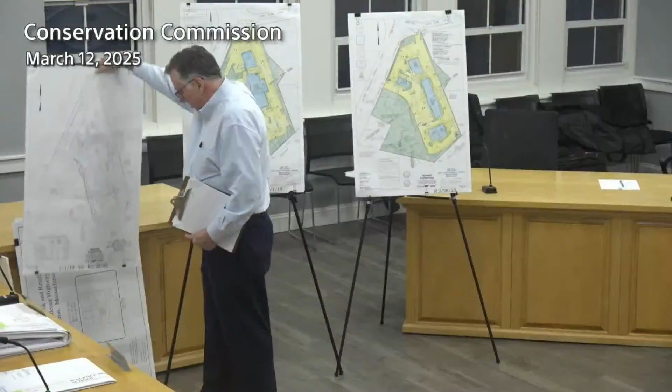Oh, I think we're on that. I'll get into that a little bit later. Okay, and that compares the two. So you should be seeing the comparison plan, which is dated... If we look at the small March set, let's look at the small set, that's the blue and red one. And then we have a set of site plans revised 2/28/25, and then we have the basic plan by Jim Stuckel's company that looks like it will be... sorry to throw a lot of.

Well, okay, listen, let me ask you something. If we eventually get to this blue and red one, that's what we really care about, right? So you're gonna do an overview on that? Yes, okay, yes, all right. I was gonna give a brief introduction. Okay, because so right now we're both on board. Thank you, on the blue and red one, but that's fine. Okay, you think this is it? Okay. So actually, if the blue and red is what we're really going for, go ahead and give us the overview.

Sure. It's got, there's bigger plans than that. Yeah, there it is. Oh, thank you. Sorry? Thank you. Oh, I'm sorry, you need to actually hold the microphone. Patrick would like you to hold the microphone, so that people on TV can hear you. Sure.

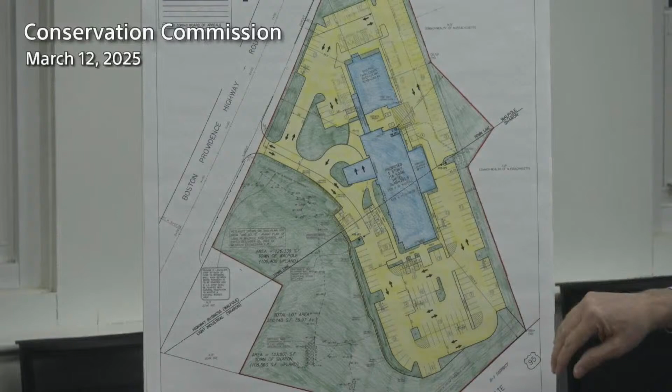Great, thank you. So the plan on the left, 7/1/19, is what you approved previously. As you can see, there's the existing Applebee's, on the intersection of Route 27 and Route 1. So there's the existing Applebee's, and you approved a proposed hotel. The wetlands and the buffer zones are in this part of the project. Today, we're here for a revised plan, revised 2/28/25. Again, we have the existing Applebee's, a hotel, where we've added a Chase Bank, a cannabis dispensary, and a retail shop. I'd like to give a brief summary of what we did with the design, and then I'll get into the comparison overlay plan.

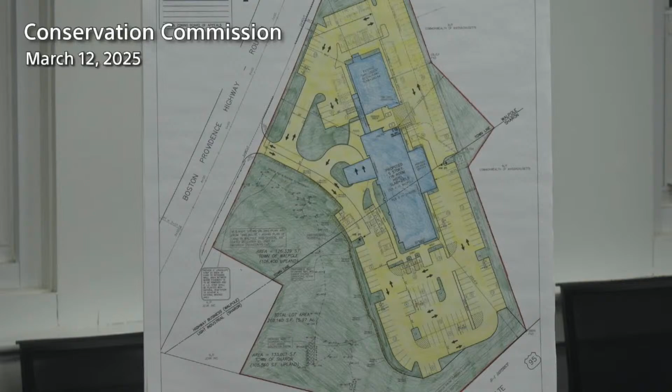We've designed the stormwater for this project with a stormwater train that has deep sump catch basins, a contact treatment unit, infiltration chambers, and then a control structure. We've infiltrated much more than the state requirement. The state requires 4,300 cubic feet. We're recharging almost 47,000 cubic feet into this system. The reason that it's so much is that we have designed this so that we are not only balancing the peak rates of flow for the drainage, but we're balancing the volumes for all of the storms. In order to balance the volumes, we had to increase the amount of our infiltration system, and that's why we have a lot more infiltration than the state requires.

So we've also, and I'll show you in the comparison plan, that we have not increased any rates going to the wetland or any volumes going to the wetland compared to what you have approved in the past. Some other things that we've accomplished: we have the 72-hour drain down, we have 44% TSS pretreatment, 90% TSS removal, where 80% is required. We've also, in our submittal, included a stormwater pollution prevention plan, long-term operation and maintenance plan, construction period pollution prevention plan, and we've done the SWPPP, the stormwater pollution prevention plan. Now I'd like to go into the comparison plan. We had a preliminary meeting with Landis, and we discussed some of the differences.

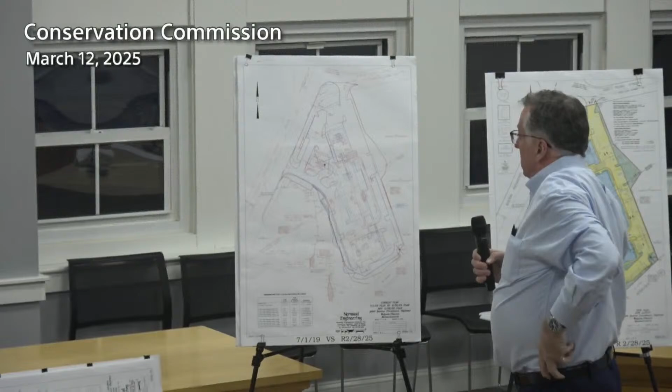The blue lines on this plan represent what was approved previously in 2019. The red lines represent what we're proposing now. I know it's kind of a lot to look at—we took out a lot of lines to make it clearer. Previously we proposed some parking shown in blue a little bit closer to the wetland than what we have now.

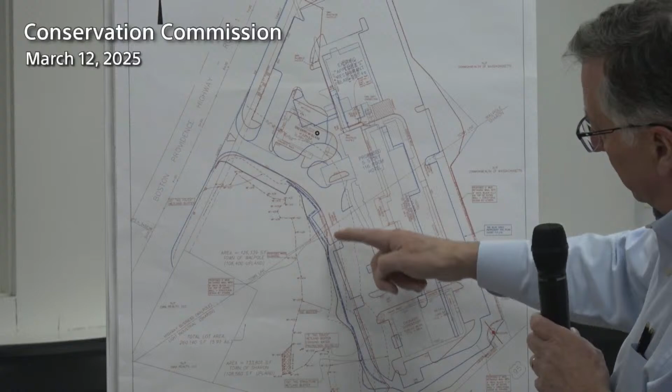The edge of the pavement in red is where we propose now, and the blue was a little bit closer to the wetlands. Let me get my notes, and I'd like to go over the summary, which is in the lower left part of the plan.

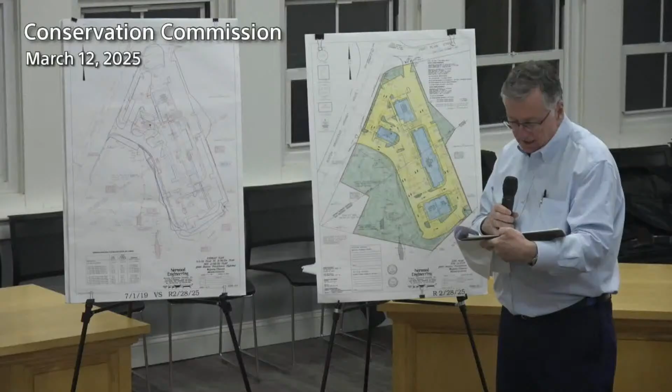For this proposal, we are increasing the impervious area by 23,000 square feet, and increasing the total area of development by 5,000 square feet. But for each storm, we list all the runoff rates and runoff volumes for the 1, 2, 10, 25, and 100-year storms.

In each case, we have either zero difference between the two plans or a reduction. For example, in the 10-year storm there's a 0.14 CFS reduction of water going towards the wetland. In the 25-year, a 0.47 CFS reduction. In the 100-year, it's 1.23 CFS reduction. So we have more impervious area, a bigger development area, but we're reducing the amount of water going to the wetland.

We have put in a number of sedimentation and erosion controls. We have a sediment barrier going all the way around, including a compost sock, filter fabric, and construction fencing. We've designed, on sheet 9 I believe, a sedimentation basin which will capture 1 inch times the developable area of runoff.

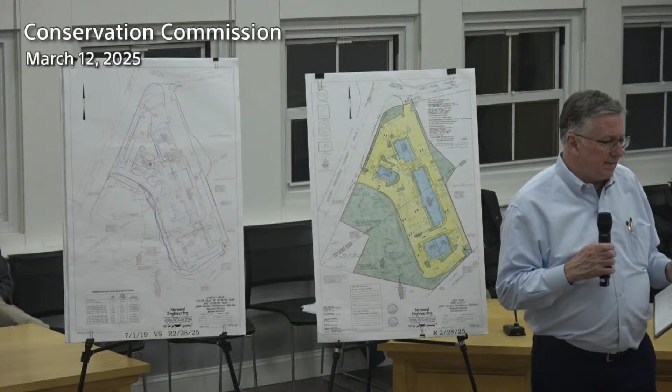So we will not have any erosion or runoff going towards the wetland, except we are proposing a berm to be built next to the proposed wall. But after the wall is built, everything will be pitched towards the middle of the site. So we have Jim Stuckel here, who can talk about construction sequencing.

I know there's a lot to the presentation, but at this point I'd like to open it up to any questions so I can specifically address what you have in mind. Landis, do you want to start with comments?

I don't have a lot of comments. I've been meeting with these gentlemen a couple of times to go over the differences. So you're infiltrating stormwater into the groundwater—so the reduction, it's the reduction in the rate of runoff, the reduction in the rate of runoff.

Compared to, yes, there's a reduction in rate compared to what we proposed previously. There's two ways to look at it: you can look at the existing rate and the proposed rate—in that case we've matched, and there's no increase. But also compared to what we did in 2019, there is a slight reduction in rate. The question was more towards whether there's a reduction in volume as well. Yes, but small. Because we don't always want to take water away from the wetlands.

But you are infiltrating it into the groundwater, so it should still support the wetlands—yes, it is, it's going into the groundwater to support the wetlands. Okay.

So I've gone over everything, and I think they've done a good job to come back with their amendment and address issues. In my report, most of my comments have to do with if the commission issues an order of conditions. All right.

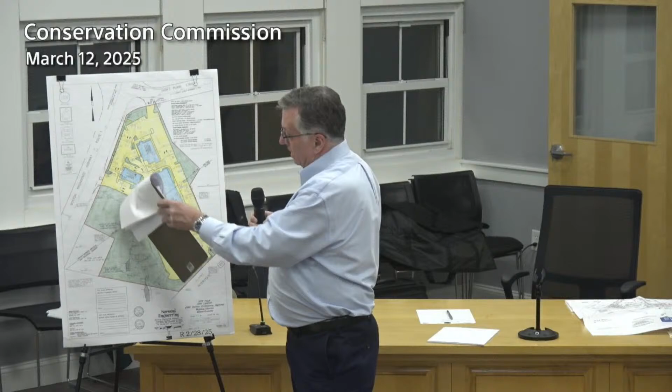One of the things Landis noted is that we want to make sure trash isn't blowing into the wetlands. During construction, there'll be an orange construction fence. When the project is done, we've proposed a 4-foot chain link fence on top of the retaining wall, shown in yellow here, and also along the area near the driveway. We've submitted a planting plan showing low-growth shrubs and trees that will also help prevent trash from getting in there. I can review the plantings we're proposing, but we did submit it, and I think Landis has looked at it and we've discussed it in the past.

Okay, good. Al, do you have a comment? Well, first I'd like to know what you propose for erosion control, because it looks like you'll be clear cutting the entire lot, and if we have a storm, whether wind or rain, if it's all open soil, that's a problem.

Yes. This is sheet 10, if people are following along. We show erosion control going along the whole length of the site near the wetland. This erosion control will be an orange construction fence, then a silt fence, then a compost sock, and then another silt fence. In addition, we're showing a sedimentation basin, a large basin about 2 feet deep in the middle of the site, and everything will be pitching towards that basin. So during construction, all of the runoff flow will go towards this basin — there won't be a lot of flow going towards the wetland.

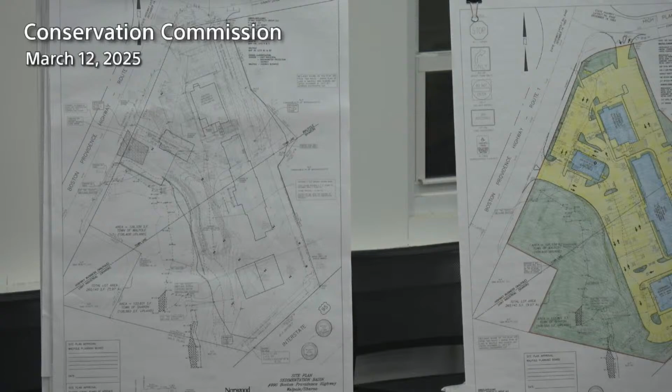Now, do they have plans for a system to water down the dust if we get into dry, windy conditions? Yes, that's Jim Stuckel — he's the construction manager, and he has some sequencing plans. You have a water truck that will spray it down, a dust control truck.

One of the things I like about working on this project is that Jim has been involved since day one, reviewing the plans with us and helping with construction sequencing. A lot of times we don't have the contractor on board, and a lot of times I'm just making presentations. But Jim is the construction manager who will be building it, and he'll be using his equipment for the dust control. That's all I have at the moment.

Okay, Medio? The wetland line is 6 years old — is that still valid? Yeah, it's very distinct. Okay, all right, that hasn't moved at all or changed, okay.

But the wall you mentioned, how high is it again? It varies, about 4 or 5 feet high. And what that does for us — it's shown in yellow — is that rather than sloping closer to the wetlands, there'll be a face of the wall on this side, which allows us to move the area of disturbance away from the wetlands.

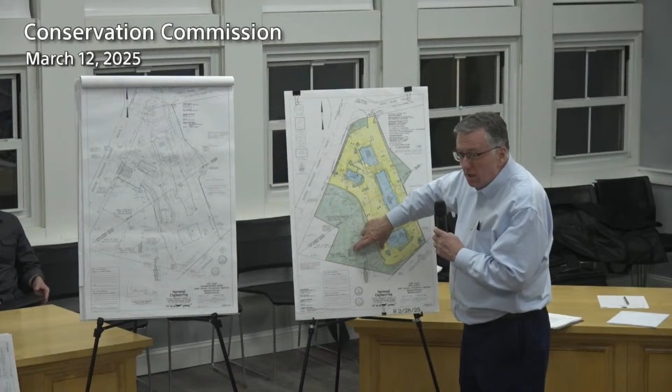Okay, but the fence doesn't go any further to the left? It doesn't — in this area we planted it with shrubs and trees to prevent anything from going there. In this area there's no fence, but we're farther away from the wetlands here, so that's why we didn't carry the fence beyond the wall.

So why a fence on top of the wall then? Because it's low — why do you need an extra fence on the wall itself in addition to the wall? Well, at the top part of the wall, near where you're raising the parking, it'll be flush, so you'll see — yes, gotcha, understood.

And we did talk about extending the fence all the way to Route 1, and sort of decided that the vegetation would be better. Sometimes fences become something to dump over, so I wanted just like a good natural barrier — a live fence, as we refer to it. Vegetation. All right, that's all I got.

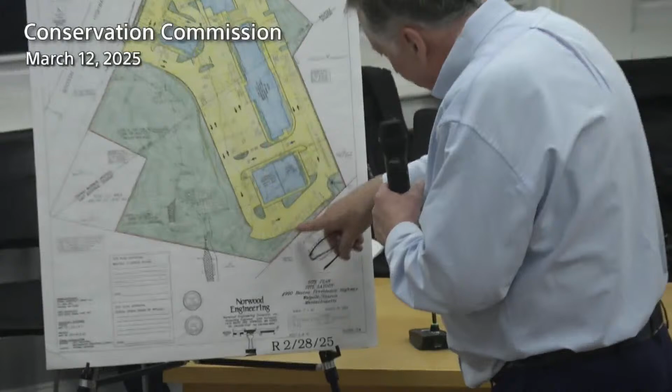How do they access the dumpsters if they're on the back side of the fence? I see a fence, then dumpsters, then I-95. There are lines showing zoning setback layouts, but the truck will be able to drive right into the dumpsters. There'll probably be a fence to keep people away, but there's no fence in this area—those lines are parking buffers and setback layouts.

The last question: this section located in the town of Sharon, have they already approved it? Yes, we've been to the Sharon ZBA and they've approved it. As background, the Walpole Planning Board has approved it. We've had meetings with the Sharon Conservation Commission and we're going to them next week. We've had discussions—Phil, the Concom agent, met in a joint meeting with Landis and us, and we think we've satisfied all of his comments, but we never know till we get to the commission.

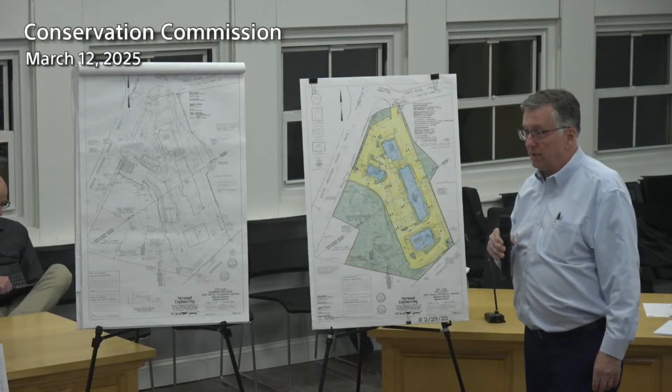Okay, that's it. Bailey? No questions, thank you. Are there any questions from the audience?

Anything else, Landis? Unless you guys want to hear more, they did include a phasing plan. Has the whole entire site been cleared? I know a lot of the site's been cleared for a while—not grubbed and stumped, but they did some clearing quite a while ago. Yes.

You have to talk into the microphone, sorry. Pardon me. Thank you. Thank you.

I'm Dave Luke, the applicant. We cleared the site two years ago, so there's some growth coming back, but it was cleared to keep the permits alive. At that point we confirmed with Landis, we had the wetland lines confirmed, and there's a sock there before we started clearing. The sock is still there and we maintain it. I had them go 10 feet off the line so there were no mistakes. So the clearing you've seen is probably as much as it will be—for the wall we'll have to clear a few more feet—but the land is essentially cleared right now.

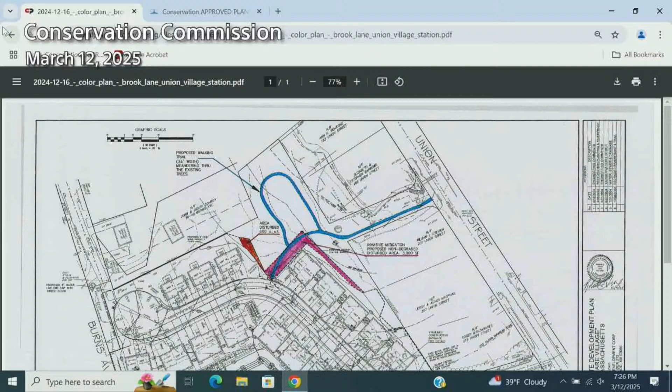This plan is not colored, but maybe real quick, we're trying to see if we have it colored. Had the PDF of the one with color attached to what I emailed today. Oh, the plan? I didn't get it up onto the website. That's when you emailed at 3 o'clock? Yeah, so.

Essentially, in what I'm calling the neck, that whole area, we propose to go in and selectively deal with the invasives. There's a lot of bush honeysuckle, and in that area in particular, there's a ton of bittersweet on the fields. So the proposal is to cut and treat the bittersweet. We don't want to try and get it out of the trees, it gets really entwined, but cut it out and treat with a cut-and-dab technique anything that can't be mechanically removed. Then we've proposed 100 shrub plantings and a herbaceous seed mix.

Landis and I had a little communication late in the day. I identified a 10-foot wide area along the brook, along that neck, which I call the brook planting zone, where of the 100 plantings, I suggested at least 40 be placed there. Landis suggested maybe that should be more concentrated there.

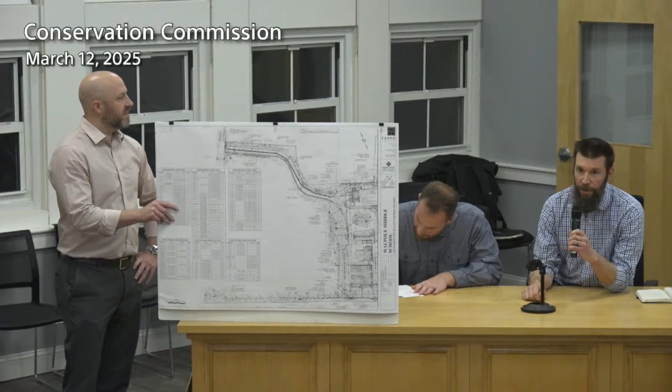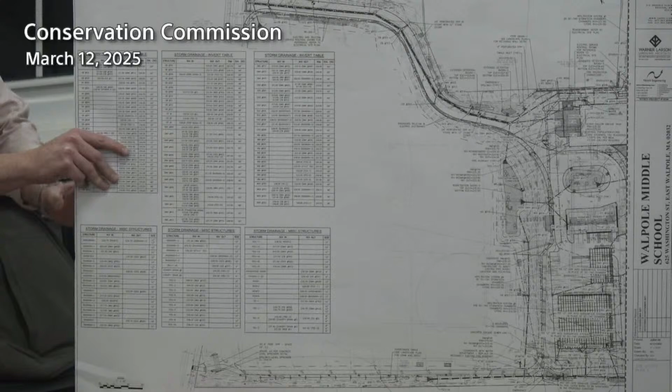So this is kind of an extension of the middle school project. We are doing some field work along East Street. The quick summary is we are adding some parking along the edge of the street, which is work that the DPW is doing. Beyond that is the work that Fontaine is doing. There's new fencing going up along East Street, and new dugouts going in on the JV baseball field and the varsity softball field.

There's a bunch of pavement going in - there's going to be a new sidewalk along East Street, along the parking, and pavement inside the fence to make everything accessible. There's pavement going around the dugouts. There's a pad for bleachers at both the JV baseball field and the girls varsity field. There's a shared dugout between JV and the varsity softball. We also have a new batting cage going in.

There's a place for new press boxes, which will be provided by the town - that's not part of the scope of the project right now. The pavement links up with the existing pavement already installed from the middle school, with existing sidewalks coming in from the East Street Drive and along the walking path. New batting cage going in, and some civil scope and electrical scope.

We're extending the existing retention basin to capture the water flow already coming along that walking path's swale, and another catch basin/drain along the East Street Drive. New bullpens for both fields. And I think that's, for the most part, the majority of the scope.

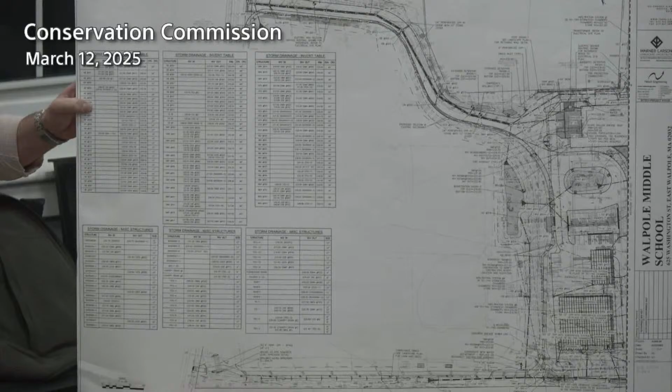Okay, could you just clarify something here? Because we have two different plans. One shows a field kind of way out off of the plan we're looking at right here - is that included? So we've got a baseball field, some kind of field, then this baseball field. So this is the existing varsity baseball field here, this is the existing varsity softball field here, and this is the existing JV baseball field here.

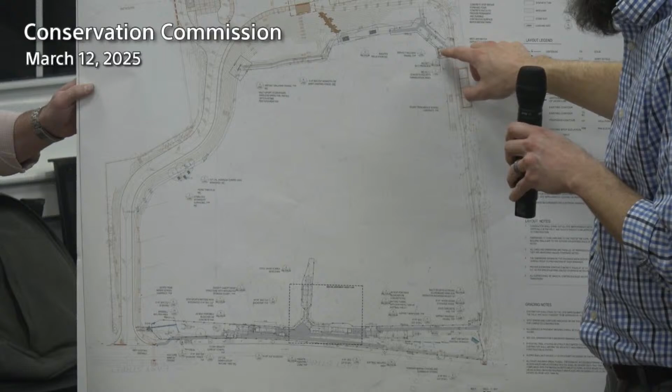So for the most part, we're not touching the fields at all. Existing fields remain. It's only the bullpens, the batting cages, seating areas, and a little bit of pavement up here off of the path that already exists. So there's a walkway going over to where the press box will be, and another walkway into the dugout to make it accessible.

Okay, good, because we were confused last time. We saw 'proposed field improvements' and thought, aren't there fields already? We were completely thrown off. So what you're really doing is we've got fields as we always did, and you're adding some access to them.

Correct. So up here there's a pad for a new press box, some walkways going in. For the most part, everything else here is already complete and existing to remain. The majority of the work is all down here along East Street, where people are parking in the street right now.

Okay, and then we were kind of thrown off - is it 65,000 square feet, 63,000 square feet? That sounded like a humongous amount to us, but does it all add up once you've done it? I can speak to that - Josh Soares, project civil engineer. So the number referenced in the letter by my colleague Marissa actually encompasses the entirety of the field. So the original approved drawing, this was considered existing site area to remain, where we weren't proposing any stormwater improvements within this area.

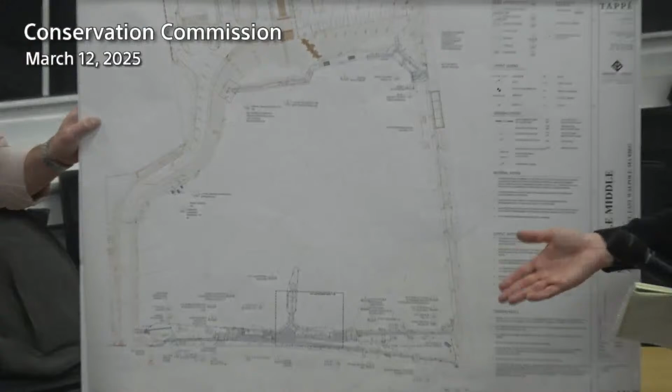That increase in impervious area—if you recall, there's almost an existing low point in the southwest corner of the field, which eventually overflows and drains to existing catch basins. From what I understand, back in 2022, with the original permitting of the project, there were concerns about the capacity of the drain mains in East Street. The project worked closely with the town through the land disturbance permitting to make sure our new site development significantly improved and mitigated the stormwater runoff into East Street.

So what we've done now in this new condition is take that existing depression in the southwest corner and expand it, treating it as a real functioning infiltration BMP—essentially converting it from a compacted, depressed field area into a bioretention basin. That will overflow to East Street.

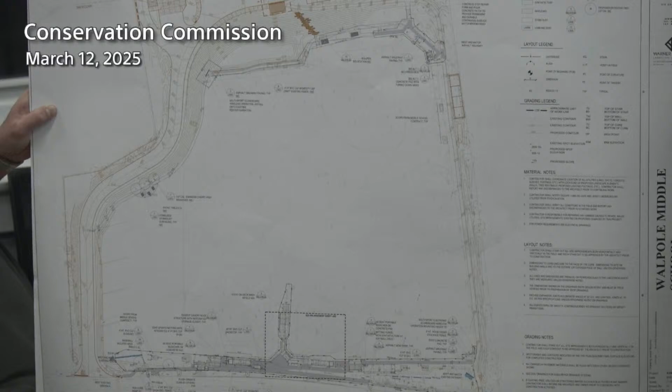So that's been designed to mitigate and offset the increase in impervious area and reduce the flow rates, even from the original proposed conditions. So we're discussing whether this is a minor modification, to be reflected in the as-built, or a major modification meaning they need to file for an amended order of conditions. So what's your impression now?

Well, okay, I have a question. Last meeting we were looking at the wording, and we didn't know whether you were treating it as existing grass or whether you were going to put artificial turf. Now I hear you say tonight that the existing grass is going to stay, and that eliminates the drainage problems you'd have with artificial turf.

Okay, so in that context, I think this is a minor change.

And just to throw in some context, I apologize—I put you on the agenda for last meeting, then realized you wanted to be on the agenda for tonight, so that was my mistake. So we had a lively discussion in their absence. They quickly looked at it. That's what we had. We were ready for you. Okay, Emilio, what do you think, Emilio?

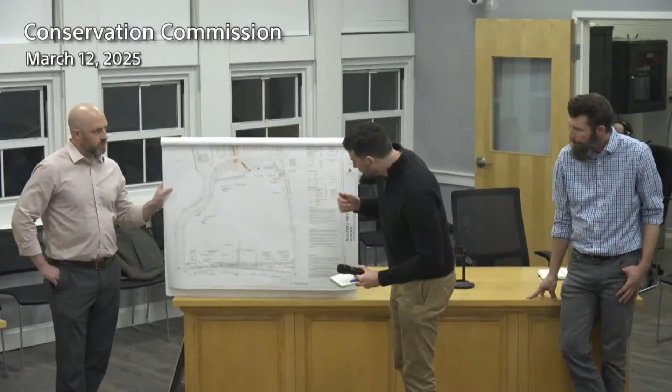I just had a question about that—you said that depression in the corner is acting as kind of a collection point, and you're going to make that an established basin? Yeah, exactly. So there's currently a conveyance channel along that southern edge, a very shallow depression. It pretty much connects, instead of a closed drainage system, the overflow from the entire site development where the new middle school is. It's just daylighting, traversing west, and currently it overflows beneath the sidewalk via a bunch of connections that we require a modification to—connecting that point with small diameter PVC pipes with a new level spreader outfall.

And then, yes, we will be expanding it to the maximum extent we can between the new curb line that the DPW is doing on East Street and the new walkway by the fields. The extent of the basin is tough to see, but it's shown in green to this extent. Anything up-gradient is actually a portion of landscape that's also graded to drain, so the site grading within the new paved area is such that the new sidewalk and paved area to the east will naturally channelize through this landscape channel into the new basin.

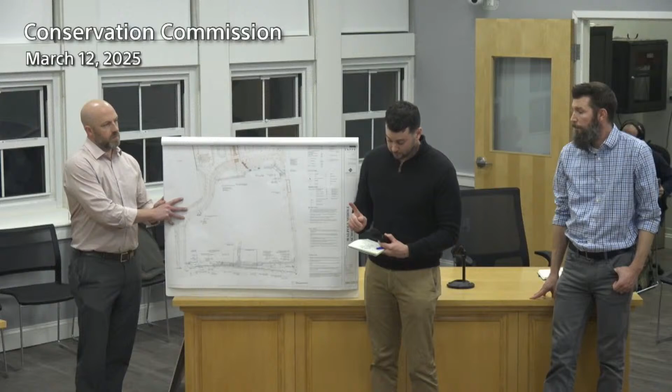Because I drive by it every day, and I noticed after the last big rain it was pretty full there—so how much bigger is it going to be than it is right now? So I know the calculated volume beneath the overflow—the intent is to treat it like a real basin. It'll have an area drain overflow with 1 foot of ponding, 1 foot of freeboard. The volume below the outlet is almost 3,000 cubic feet, and the total system volume is 7,600 cubic feet, before overtopping under that emergency scenario into East Street.

Okay, and along the walking path, you said the flow goes down beside the path and then into that basin? Yeah, it'll be conveyed via very shallow PVC pipes under the walkway and then directly into the basin.

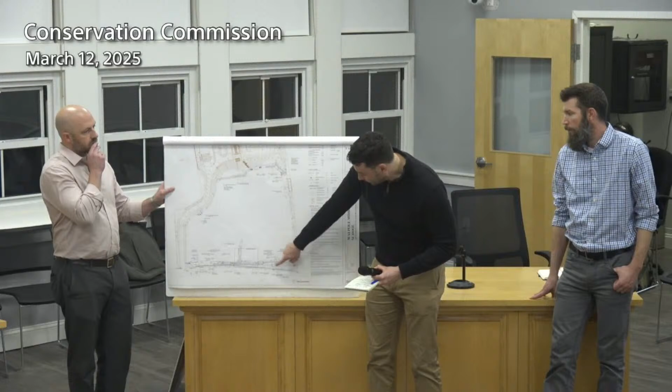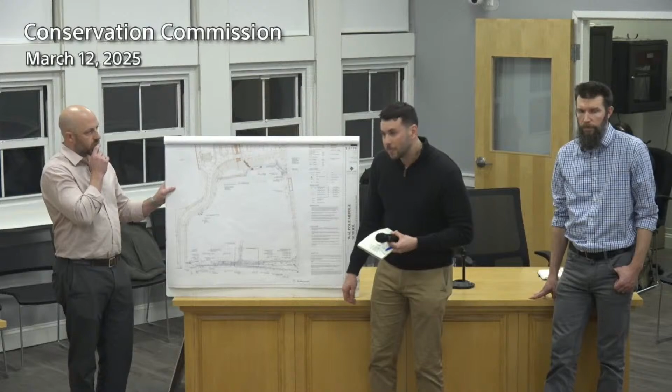To that basin there, and the overflow, it does today. The overflow of the basin goes to the storm drains, yep, it connects to the street. I'm sorry, I can't remember that cross street, but across East Street to a little side street.

Okay, all right, no questions? No questions. Okay, so are actual parking spaces being added, or is it just pedestrian ways?

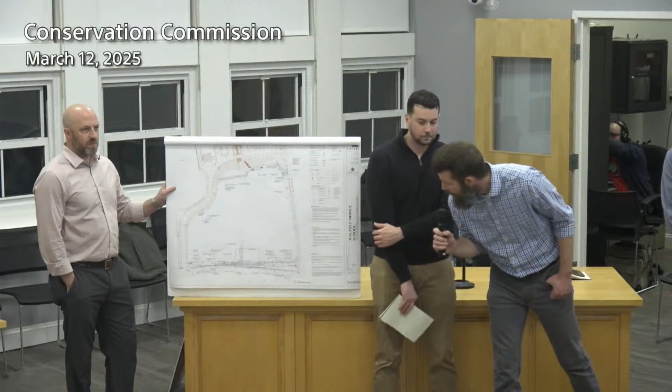I think there's 11 parking spaces, parallel parking, I think, along the streets. So basically we're taking the parking that's already there, that's kind of not designated, and kind of pushing it in a little bit to get people off the road.

Because yeah, when you park there, cars are flying past you, and you gotta watch your door getting out of it. Right, and what I've noticed is that little depression has actually worked pretty well, but if it's improved and enlarged with the larger flash storms that we had and will continue to have, that's a benefit. And I see the paving of those parking areas a benefit too, because people pull off the shoulder there and it gets very muddy and they track mud onto the street, so that's gonna be an improvement as well.

I know the town engineer has seen this plan. He did not provide a letter for tonight, meaning if he has any additional tweaks or comments, I'm sure he would get them to you. We've been working with Carl and everybody to try to figure out parking and everything else. He had some comment, I think. I'm sure you're working with them, so I don't have a problem with that.

All right, so what do we think? It's a minor modification, yeah, that's what we're thinking. So I would just send you a letter that they've agreed there's a minor modification, and it should be reflected in the as-built plan. Great, thank you.